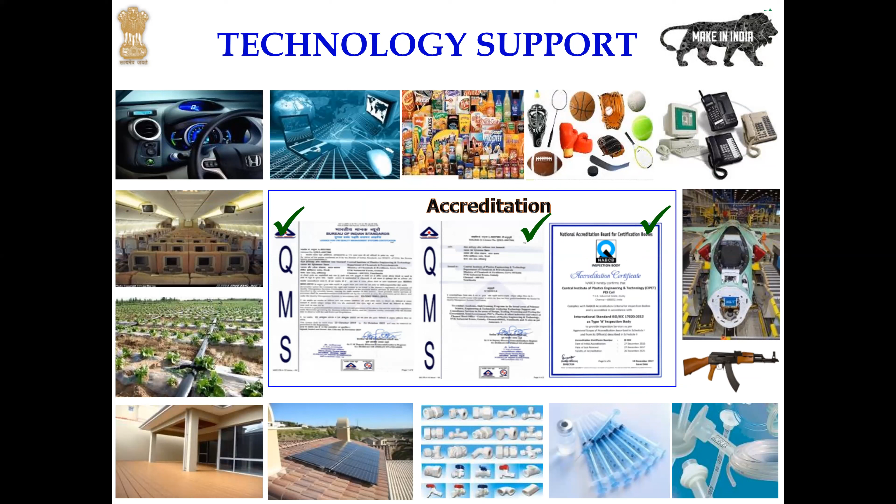Today I will be focusing only on the Bangalore Center. We have established a laboratory here, which has been accredited by NABL, NABCB, and other national bodies, and we support almost all kinds of industries for their requirements in testing and characterization for plastics and polymers.

In CIPET Bangalore, I will be covering these basic topics today: what all we do here, apart from research and development, technical consultancy, technical support services, and even specialized training, and PhD and MS by research.

So the sole purpose of the center was to set up as a one-stop facility for both design, product development, material characterization, processing, simulation, and product validation. Here we have both high-end software for designing, machinery for prototyping, and laboratory for developing materials.

So these are the few areas in which we deal, like biopolymers, composites and nanocomposites, plastics recycling, coatings and adhesives, and polymer electronics, design optimization, rapid prototyping, reverse engineering, etc.

Some of our research consultancy services cover the following areas, wherein we have specialized experts doing research and consultancy projects, for example bio-based composites and materials. Here we are focusing mainly on packaging material developed through bio-based materials. Currently we are running 2 to 3 projects on this for developing eco-friendly packaging material.

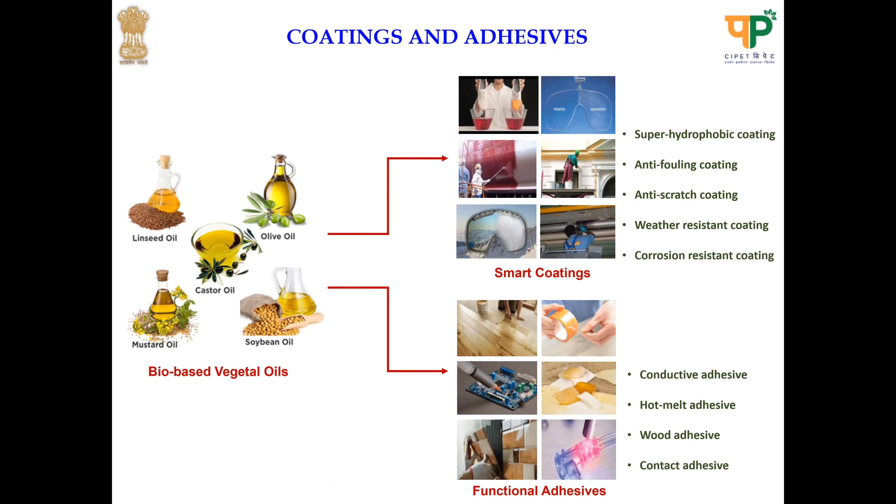In the area of coatings and adhesives, we have our expert scientists working on development of super hydrophobic coatings, anti-fouling coatings, weather resistant coating, etc.

When it comes to energy related research, here we have 3 to 4 scientists working particularly on energy materials, basically development of catalysts, development of membranes for fuel cells, batteries, etc.

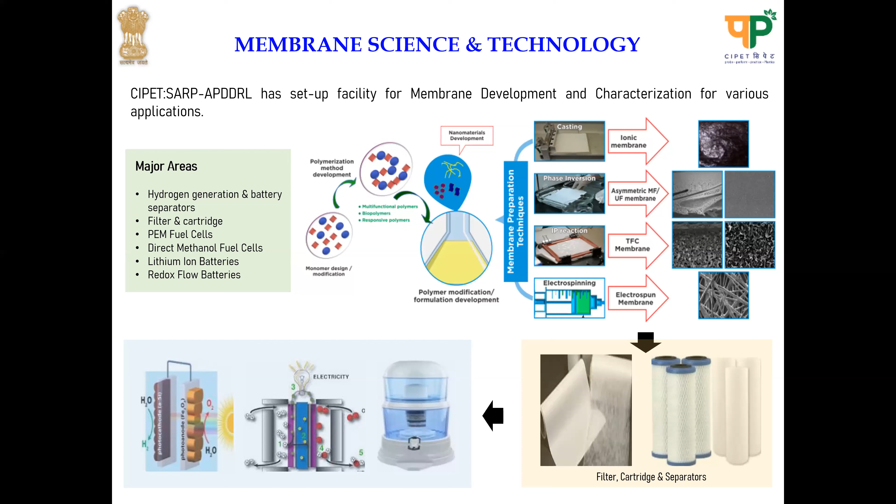We have all the setups for developing both membranes and also checking the properties of the membrane for the efficiency of it.

As CIPET has been involved in the past 50 years in plastic, we have a duty to take care of the end of life solution of plastics. So we are also working to provide solutions to industries on different types of plastic waste, such as MLP multi-layer packaging, single-use plastics, biomedical plastic waste, and currently we are running 2 projects basically on value addition of biomedical plastic waste.

And then we have the product design and development area, where we have all the software, reverse engineering hardware, prototyping machines, and all the new development areas.

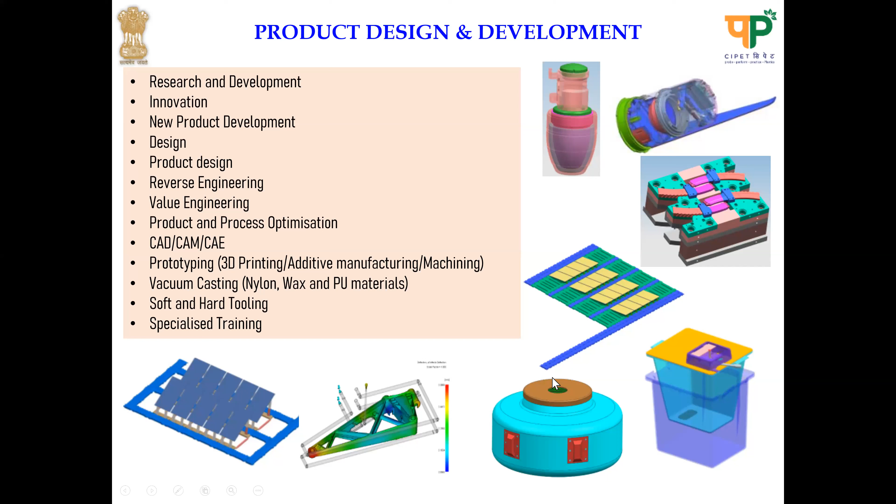These are some of the products developed by our scientists, not in this center but in the previous center where we worked. So these are some of the products showcased on the outline.

When it comes to technology support services, apart from providing the testing services, we also take care of the basic consultancy services for analysis of the material and even the product. So if any industries have any issues or defects, or are facing any problems in their processing or development of product, then they approach us and we provide them solutions for this.

So we have all the testing equipment which cater to mechanical testing, life cycle analysis, morphological analysis, thermal analysis, and other high-end spectroscopic studies.

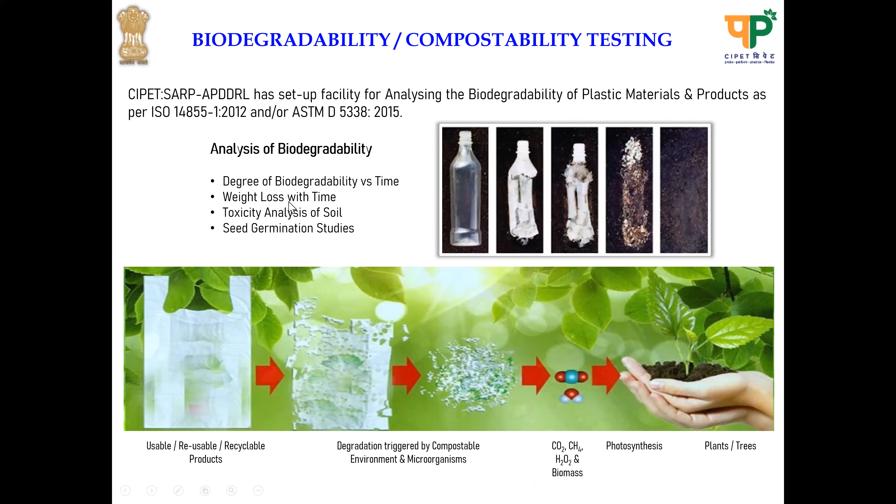And one more very hot area is biodegradable material. We do the testing of these materials. We follow the standard of ISO 14855, and we do the testing for 6 months, wherein we evaluate the performance of the material under compostable conditions.

And one more important area is the life cycle of the plastic material, like how many times the material can be recycled to be put in good use, either in the same application or in any other value-added application. So we check the material for its number of recyclable properties.

We do the analysis such as FTIR, DSC, TGA, and find out the properties of it, how the property is varying with each cycling, and then we can suggest in which all products it can be used.

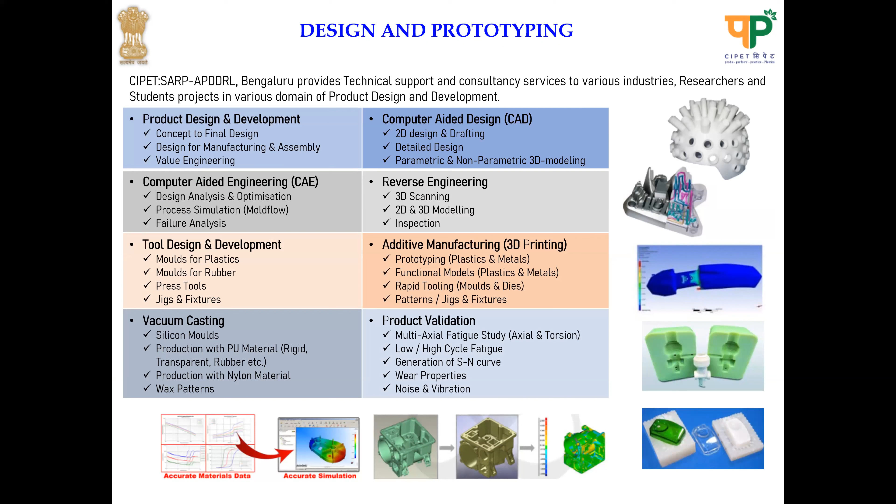As I mentioned before, we have the following facility for reverse engineering, product development, and design. For example, this one, vacuum casting machines we have. In 3D printing, we have the FDM machine.

So let me just take you to some of the facilities what we have at our Bangalore center, which is now fully established.

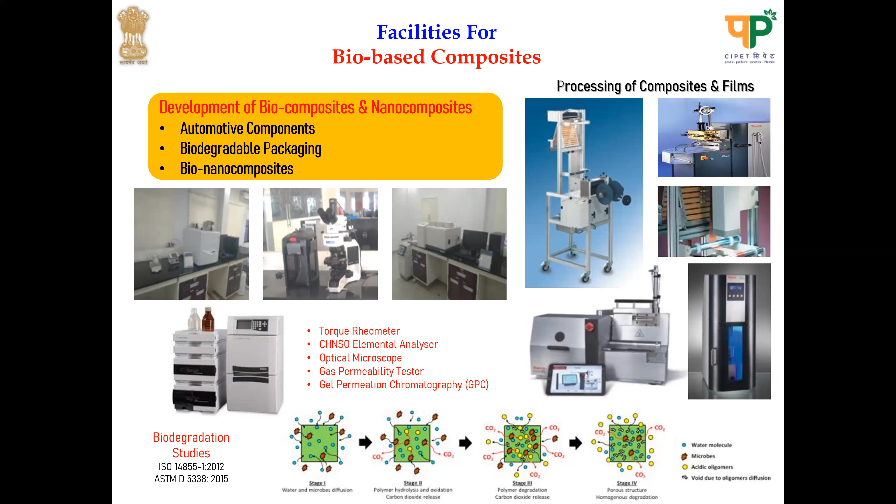Then for bio-based materials, we have this torque rheometer, blown film producing machines. Then we have GPC, micro compounder. We can also use very small amounts of material for micro compounding and producing samples. Even if we have around 10 to 15 grams of material, we can do the compounding and produce samples for testing using our micro compounder and micro injection molding machines.

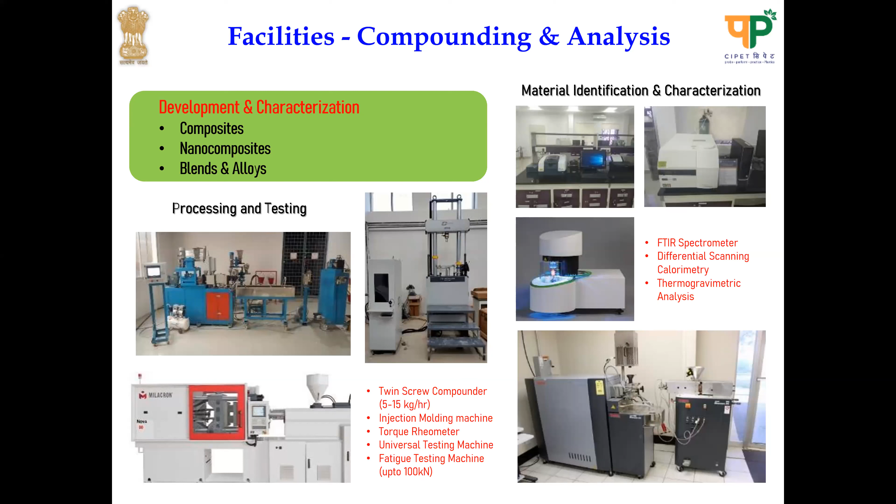Then for compounding facilities, we have a twin screw compounder, rheometer, injection molding machines for making samples. We have an 80-ton machine which can easily produce some small samples.

Then for the membrane process, we have our electrochemical workstation. We have forward osmosis setup, reverse osmosis setup, where we can check the properties of the developed membranes in-house and tweak the properties.

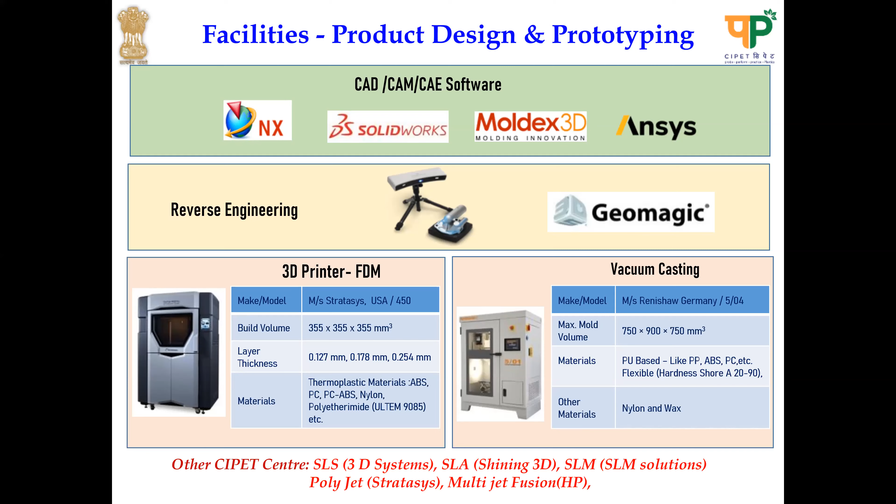In 3D printing, as I mentioned before, this is the machine we have, an FDM machine which can easily print up to 300 to 400 millimeter parts, and a vacuum casting machine which has a bed size of 750 by 900 mm.

And for testing the products, we have an axial torsion fatigue tester, which is a high capacity machine that we can use for testing plastics, composites, and even metals. It has a capacity of 100 kN. We can do all kinds of testing such as torsion, shear, and bending fatigue, and even in a specified chamber with temperature from -150 to plus 300 degrees Celsius.

Apart from that, for mechanical testing, we have this pin-on-disk tribometer and vibration lab, where we can find out the resonant frequency of either the material or the product.

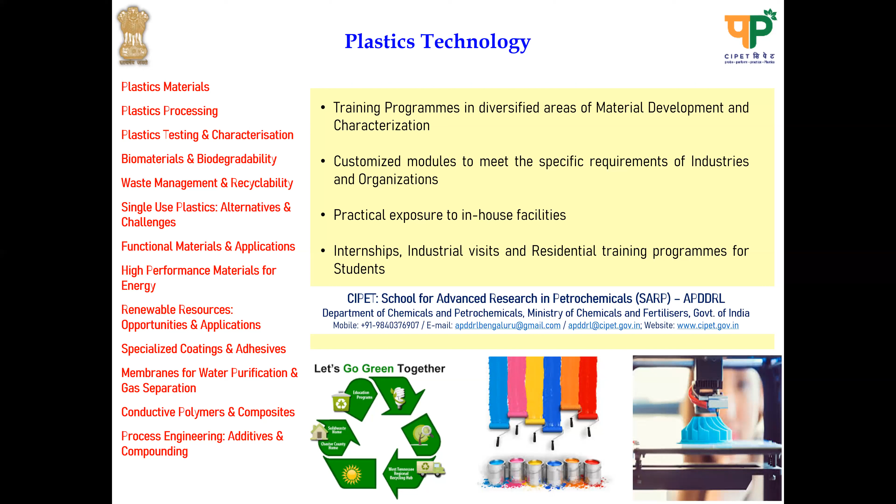Apart from this, we also conduct specialized training programs covering topics such as plastic materials, plastic processing, biomaterials, waste management, and functional materials. The topics are not limited to this - even if industry comes up with any tailor-made areas, we can cater to that. Even if we don't have experts in a particular area, we approach experts from neighboring centers or industries and give training on those topics.

And we also conduct the design program for CAD/CAM. We have software such as ANSYS, SolidWorks, Moldex 3D, and other CAD/CAM softwares.

We are registered and recognized as a research center from VTU, and we are already running the MSc and PhD program, and we will be starting the MS by research program in the coming academic year.

Before handing over to the next speaker, I would like to showcase a small video of our center.

Is the video visible? Yes.

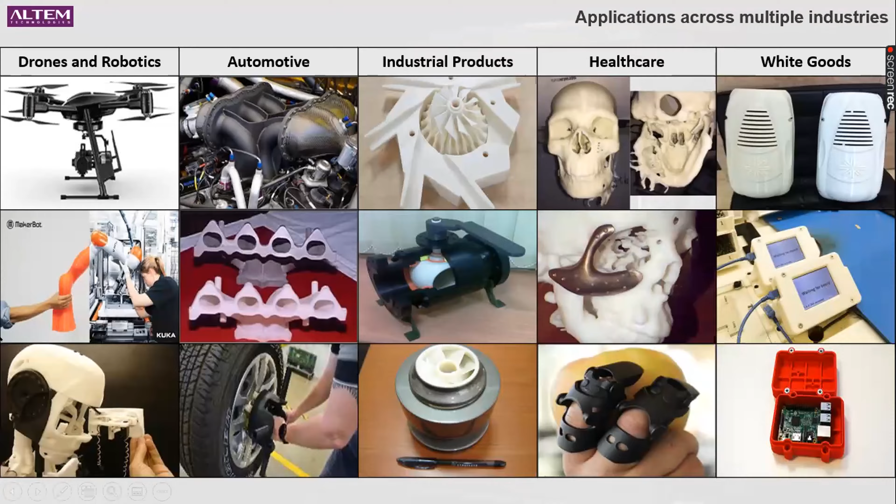I am Abhishek, representing Altem Technologies, and today we're going to talk about functional and performance applications with 3D printing.

Now, whenever we talk about 3D printing, we have a common misconception that 3D printing is only possible for basic design validation and prototyping. That is not the case. Today, with advancements in materials and technology, we have been able to take 3D printed parts into actual production scenarios and do testing on 3D printed parts in the same manner as how we would do it with conventionally manufactured parts.

Before I show you some of the work that some of our customers and we have done in this area, I'd just like to give you a small introduction about our company.

Altem started in 2011. We started as a 3D innovation platform company. What that means is that we have products and services that enable customers to go from their idea to product, ranging from design solutions from Dassault Systemes, simulation solutions from MSC software, 3D printing solutions - today's presentation is going to be more or less on this subject - as well as 3D scanning solutions.

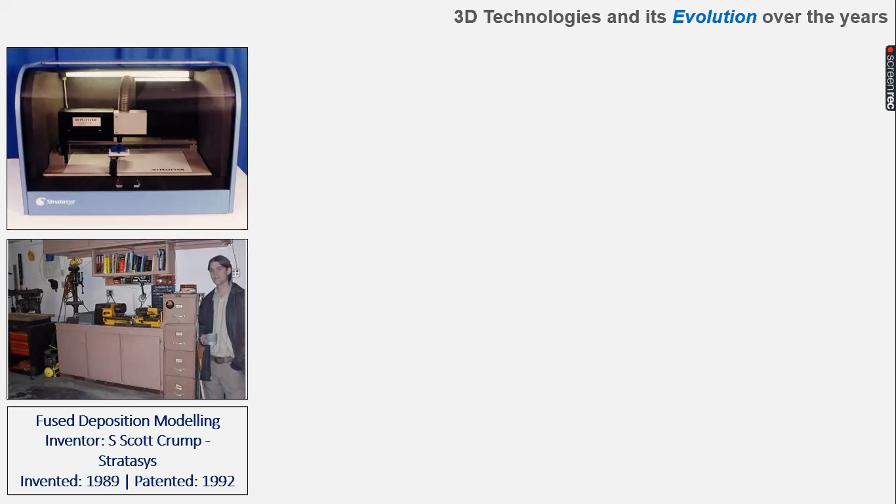And back in the day, this is what a 3D printer used to look like, and it still cost tens of thousands of dollars, which could only be able to produce tiny parts in very, very basic materials. But back in the day, it was a stepping stone to a revolution that has now come.

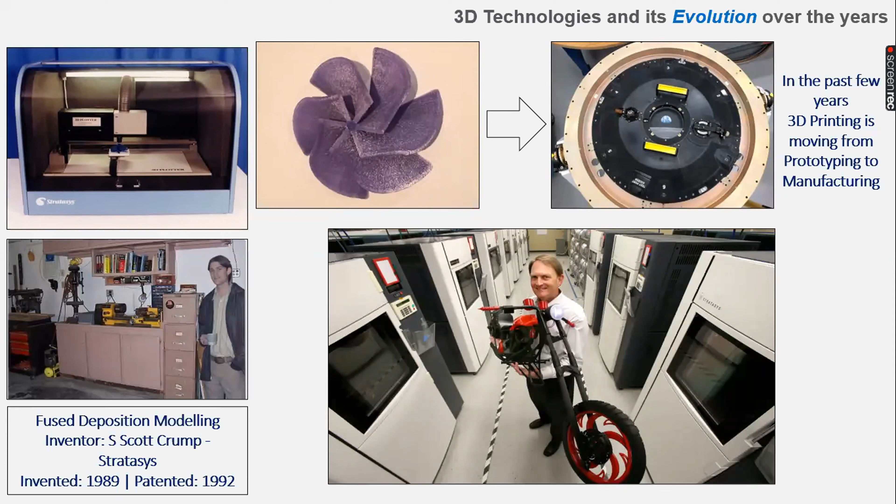But as you know, in the past 30 years we have gone to now several hundred different types of materials that we can produce, ranging from basic materials to extremely strong materials which are now replacing even metals in certain applications. Part sizes or sizes of the machines have grown exponentially from a small, maybe 2 centimeter by 2 centimeter or 2 inch by 2 inch build size to a 1 meter bed size. And today, the industry is moving towards a trend where 3D printing is being used for low volume manufacturing also, as a combination of both of these attributes - size and materials.

Now, as ma'am and sir also mentioned, one of the key benefits of 3D printing is that it can produce parts with any or every geometry or any or every kind of complexity without you having to worry about how you will make this part. When we were studying engineering, we were always taught how to design parts as per the manufacturing process. And in that process, sometimes we would lose some of the benefits of a better design because we did not have the capacity or the capability to manufacture it conventionally, or it would be too expensive or too cumbersome. But because 3D printing can produce any geometry, sometimes something which is not even possible even if you combine multiple technologies, that makes it suitable for many applications.

So in principle, any industry that requires any type of parts, whether it be one number or whether it be 1,000 number, or whether it be one design or tens of designs, can use 3D printing. Some of those industries: automotive, aerospace, white goods, healthcare, drones and robotics - you name it, 3D printing is almost everywhere.

Now, let me introduce the technology that CIPET has, and it has been one of the most successful 3D printing technologies. This technology is called fused deposition modeling. On the screen, you see a machine called Fortus 450mc, which is one of the production grade 3D printers offering from Stratasys - the same machine that CIPET Bangalore has.

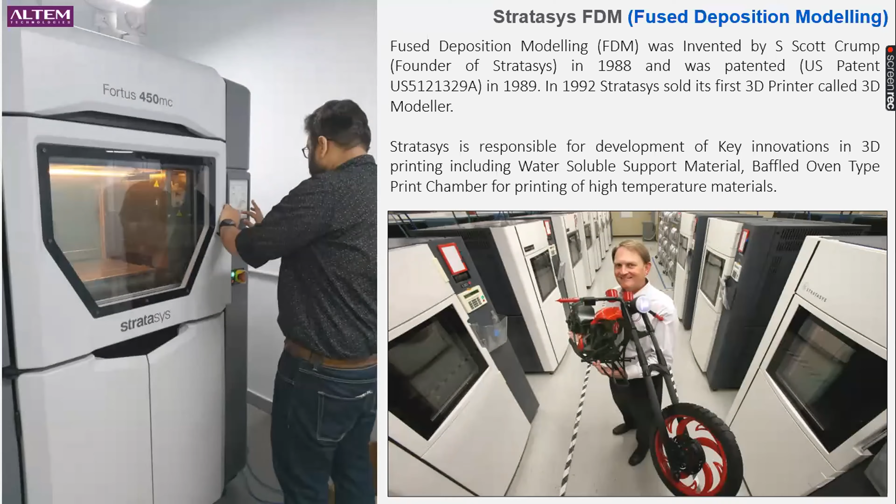And the reason why this machine is successful is because it enables you to produce as complex as possible parts, but more importantly, real world thermoplastic materials. What that means is that the properties of the materials that you get out of the 3D printer will be very close, maybe around 90% close, to what you will get with conventional manufacturing. Most other 3D printing technologies use synthesized materials, which can give you complex geometries, but are not able to give you the exact strength of material or the exact properties of the material as your conventional manufacturing methods do.

As a result, you can use these parts as replacement parts to some of the conventional manufacturing processes, as well as even use them for real world testing.

Now, how it works is very simple. I'll explain it through a video. One second.

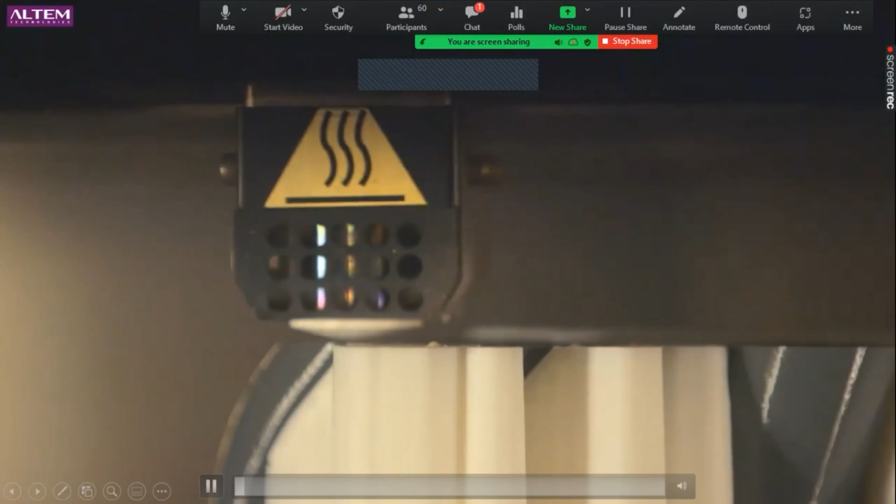This is a small video which will explain how FDM works. In a word, it's a game changer. It can create parts and geometries that you can't do in injection molding. That's going to create a revolution in the near future, and this technology will be adopted as a major process for manufacturing components.

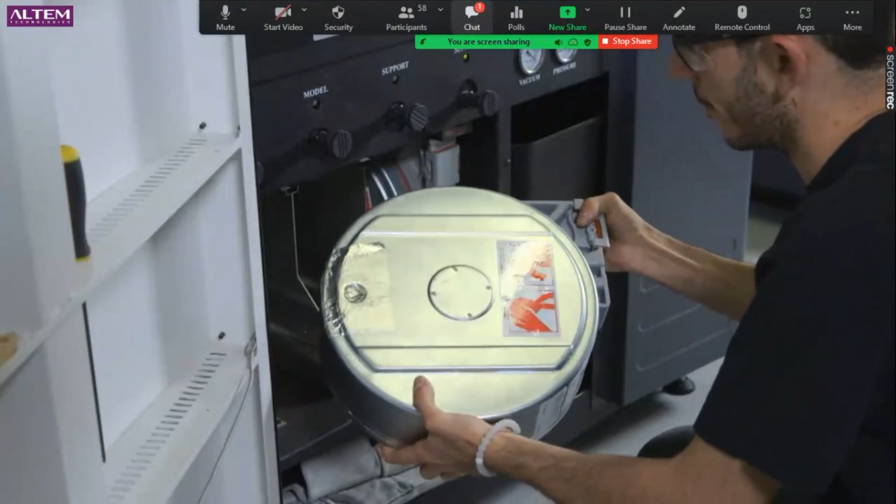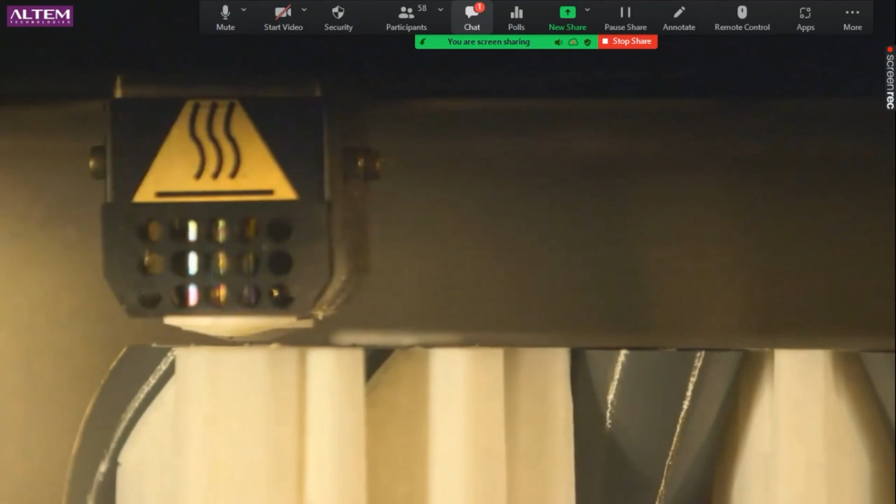FDM stands for Fused Deposition Modeling. It's a fancy word for laying down a small bead of plastic. What's really cool is you can use a real engineering grade thermoplastic, the same stuff you'd injection mold. If someone needs ABS, polycarbonate, or a high temperature Ultem, we can print it directly instead of casting or having injection molded parts done. You're getting close to the same quality in mechanical properties and aesthetics as an injection molded part, but through an additive process.

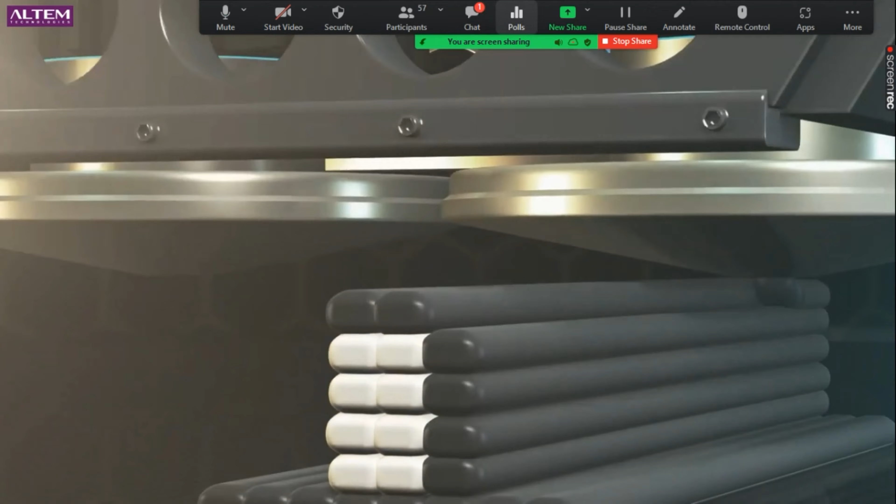Our software takes a 3D data file and slices it into layers, creating a tool path sent to the machine. The raw material is produced into filament, like fishing line, wrapped around a spool as your cartridge of raw material. That material gets fed through the machine to the head, where it's liquefied and extruded in fine layers. Support material is extruded at the same time, and layer by layer the part grows.

When the part is completed, it's removed from the build platform and the support material is removed. We also offer post-finishing operations that smooth out those layers, whether it's hand finishing or cosmetic paint, so we can still provide smooth looking parts.

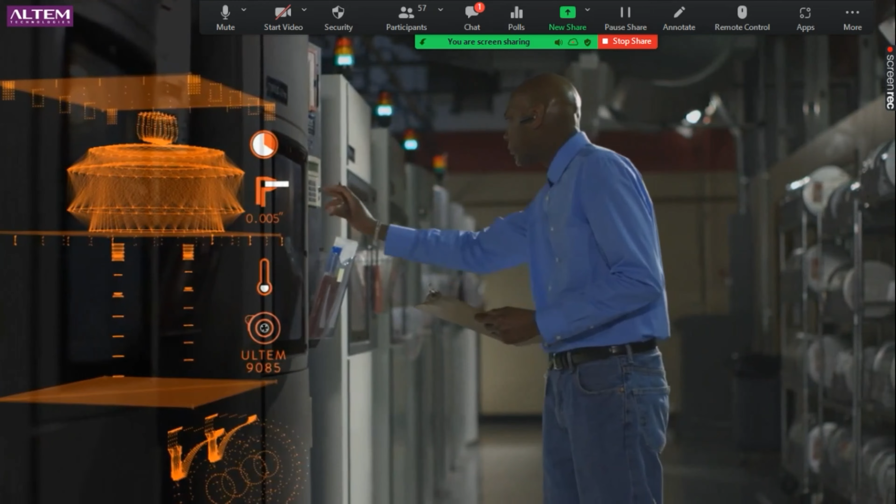We developed the technology to fit a full breadth of geometry sets. We've seen it used anywhere from small prototypes for mock-ups and test fitting parts, to really large structural pieces that go on airplanes or UAVs. We've gone from doing simple concept models, one or two at a time, to now doing production runs of 5,000 to 10,000 parts, actual parts coming from FDM technology.

With it, we can do things I have yet to even think of, but the younger generation is going to take this FDM process and turn it into something that's going to blow me away someday.

That essentially explained how FDM works and what kind of materials we can produce. One of the key benefits of this technology, as I explained earlier, is the fact that we can use real world materials. Today we have about 15 different types of polymers, super polymers as I like to call them, ranging from basic materials used for prototyping applications such as ABS.

We also have electrostatic dissipative materials, very suitable for conductive or electronics applications, high impact materials such as polycarbonate and PCABS, and strong but flexible materials such as nylon. Then we have high performance materials such as Ultem polyetherimide, PEEK polyether ether ketone, and carbon fiber reinforced materials. All of these materials are fire resistant and chemical resistant.

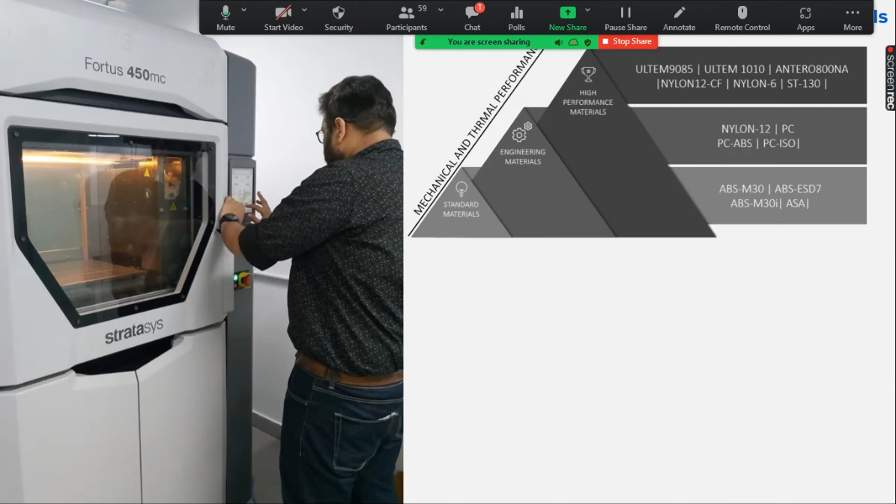They have temperature resistance up to 220, 230 degrees centigrade, so these materials can really be used in applications where complex geometries are required, but also functionality and strength is required, whether it be smaller parts or very large assemblies where you can print the parts in sections and then assemble them together.

Some material properties are on the screen for you to take a quick reference. You can take a screenshot of the slide if necessary. However, I think we'll send a white paper as well.

Some of these materials, for example Ultem 9085 and Ultem 1010, are aerospace certified materials. What that means is that they are pre-approved by the FAA to be used in aircraft. Our Indian aircraft, satellite, and missile manufacturers are also using these materials to put parts on aircraft, satellites, and missiles. Beyond the aerospace industry, this material is fire resistant and chemical resistant.

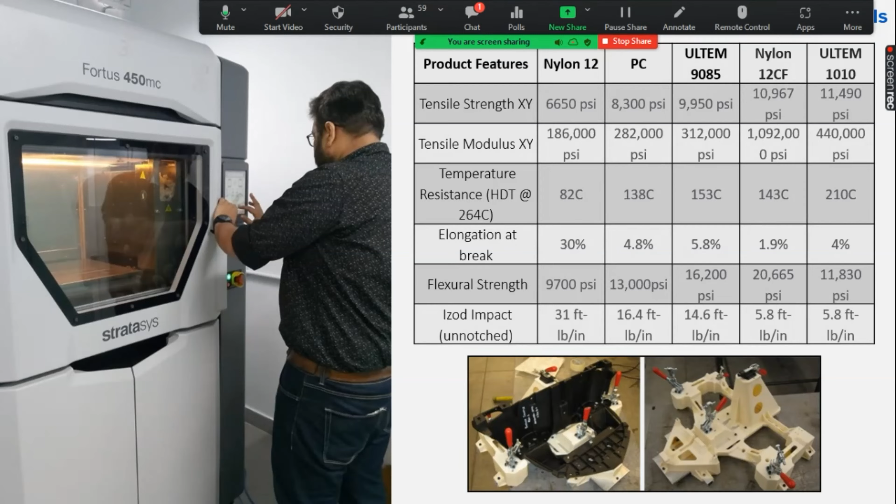So even if you are not an aerospace company but have requirements of high temperature or fire resistant materials, you can use it. Another very interesting material is nylon 12CF, which is 35% chopped carbon fiber by weight with nylon, which can produce parts even stronger than aluminium. The stiffness to weight ratio of this material is better than aluminium. So we have a lot of customers replacing conventional bulky, heavy aluminium parts with 3D printed parts, and they've been working very nicely.

This particular part was actually done for a Formula One car. And you can imagine that a Formula One car has a very high stress environment as compared to a normal passenger car. It works at very high speeds, difficult tracks, and so on. The aerodynamics is very different. We were able to print a part in Ultem 9085 material and run it throughout the entire season for a commercial Formula One application.

So that's the epitome of what 3D printed parts can do for you. They can work as good as conventional parts, but you can have a part like this in hand in a matter of 24 to 48 hours, as compared to the 6 to 8 weeks, or 5 to 6 weeks, that you would require to produce it conventionally.

Now typically 3D printing can be divided into 3 applications. Application number 1, which we all know, is design validation. You are designing a new product and you want to see how your design looks like, feels like, and fits like. You can quickly take that CAD, put it into the 3D printer, it will create a prototype. In a matter of few hours, you can use that prototype and check your fitment.

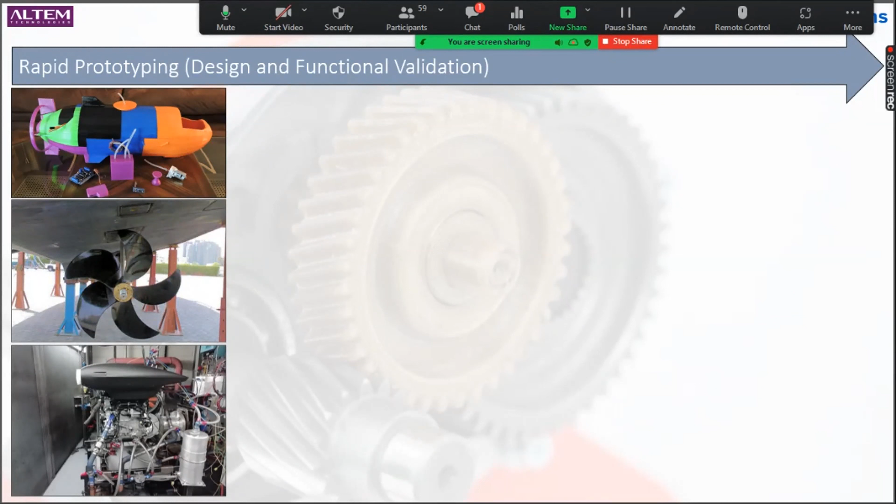But that's not enough. Today, industries need prototyping to be not just design validation, but also functional validation. So with the help of the materials I told you about earlier, you can actually print the part, put it on the real world test scenario, and run the test as you would do it in the real world scenario.

The next application is manufacturing application. Now what if you have complex designs but low number of parts? One example on top of my head is drones. For those coming from the drones industry, drones is a very custom application. While the drone body might be the same, drones today are made so they can be heavily customized. Today you want to put a camera on your drone, tomorrow a heat sensor, the third day something else.

So you can't keep buying new drones every time. For applications where the number of parts is low, maybe 500 or 1000, 3D printing can be directly used in end-use part scenarios. But what if you're in a scenario where you have either a very large number of parts, high complexity parts, or you want to produce a part in materials not available with 3D printing? That's where the application of rapid tooling comes in.

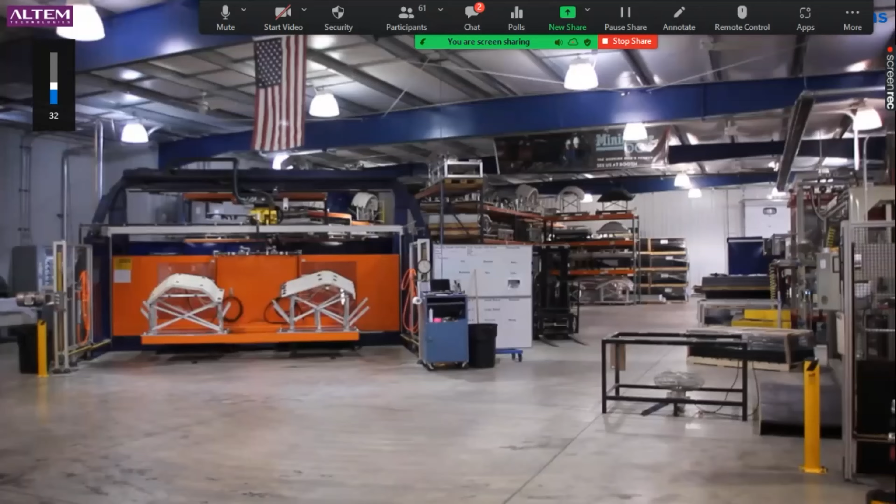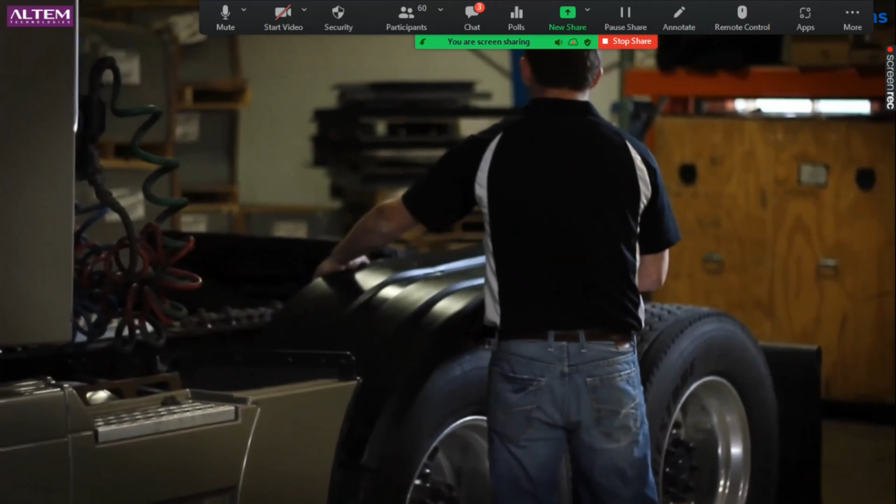My name is Craig Kruckeberg, CEO of Minimizer. We are a manufacturer of plastic truck parts for the heavy truck industry. We've been in business since 1984. Here at Minimizer, some of the projects we work on are injection molded components, and primarily right now we're looking at several mounting brackets. A lot of these parts are made from glass fiber and rugged plastic materials, so it's a challenge to prototype those products. With the black Ultem material, it's very high tensile strength and rigid. We found that black Ultem is a good alternative for us to prototype these mounting brackets and even take them out into the field on a truck and test them out.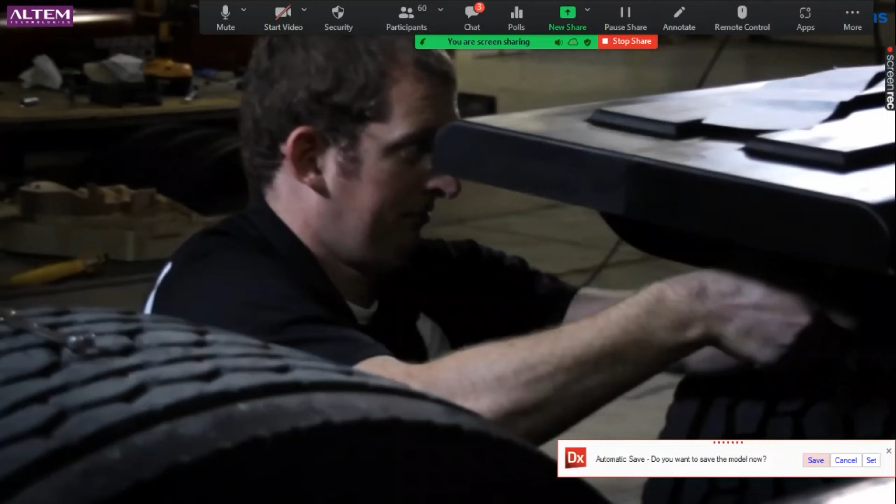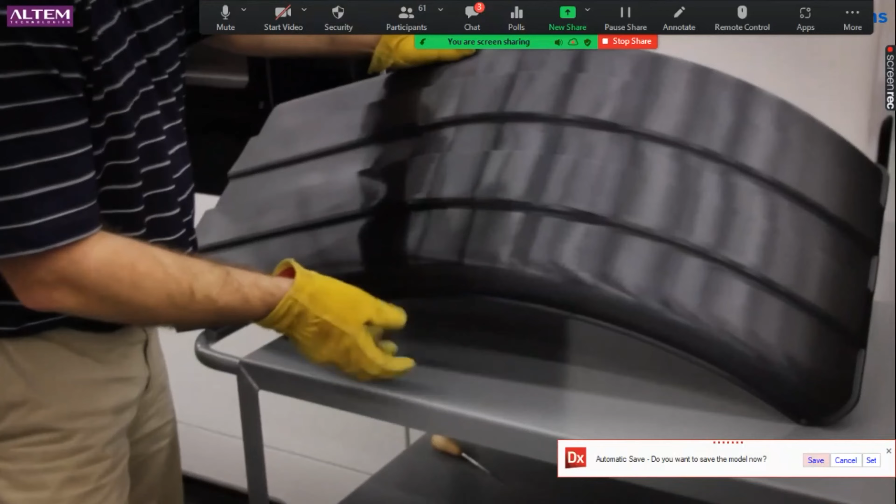When we make an FDM part, we mount it on a truck, so a lot of times there'll be drilling, using fasteners, even mating parts together. The black Ultem material is valuable because if there needs to be any sanding or cutting of the part, it allows us the flexibility to do that, but still have an aesthetically pleasing part to put on a vehicle. The reason for black Ultem, and we're excited about this, is that 90% of the color of my product in our industry is black. We caught one of our OEMs actually using the product in road trials with the Ultem, and they decided that in this application they don't need to tool up for it, so if we could just print out 15 of these for a military contract, that's all they need right now. So we said, okay, give us that part back, we'll give you the Ultem in black. That's when we found out this came out. We were going to paint it, but now that it's coming out in black, we don't have to worry about the paint. Having the black material is a big bonus for us. We don't have to spend the time to finish the part, and at the same time we get the same material properties that we look for in the Ultem material.

So again, this video shows you how a commercial automotive company, a truck manufacturer, is taking 3D printed parts and using them in high endurance scenarios where the part has to go through all sorts of mechanical loads and stresses, and it is strong enough to be used as an end-use part, solving not only a technical challenge but also a commercial challenge, of how you make parts when you have very low numbers and tooling is not justified.

Another example is from a pump manufacturer in India, where, as you can anticipate, the profile of the pump determines its efficiency, and that's the parameter that has to be tested. So instead of waiting 3 to 4 weeks to have a sand cast pump in hand, this company produces 3D printed prototypes, tests them in real world conditions at 3100 kilopascals of pressure and about 20-70 degree temperature, and on that basis they're able to get an idea of whether their profiles are correct or not.

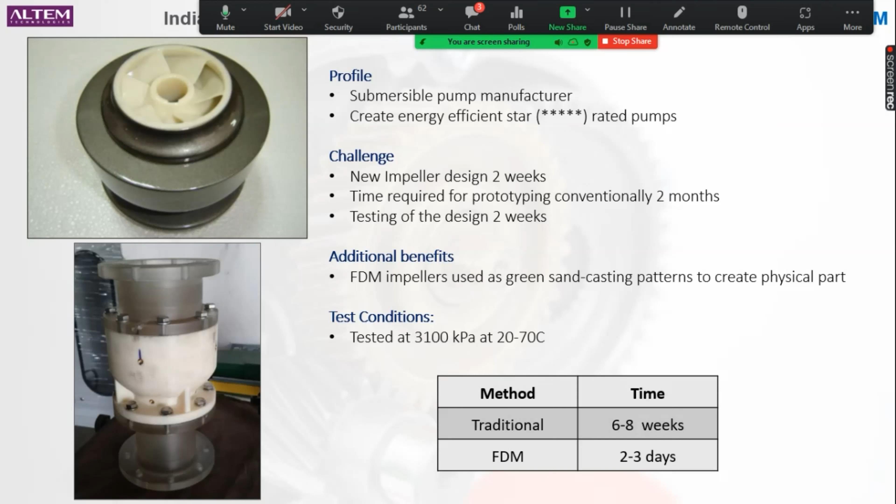That's not all. They also use the same 3D printed part as a subsequent master pattern for sand casting. They take the 3D printed part, create a metal part out of it using sand casting, and then use that for further testing. So within the same prototype, not one but two challenges are addressed, and they're able to get their complete process and testing done in a matter of 2 to 3 days, at substantially low cost compared to the 6 to 8 weeks it would take with conventional tooling-based methods.

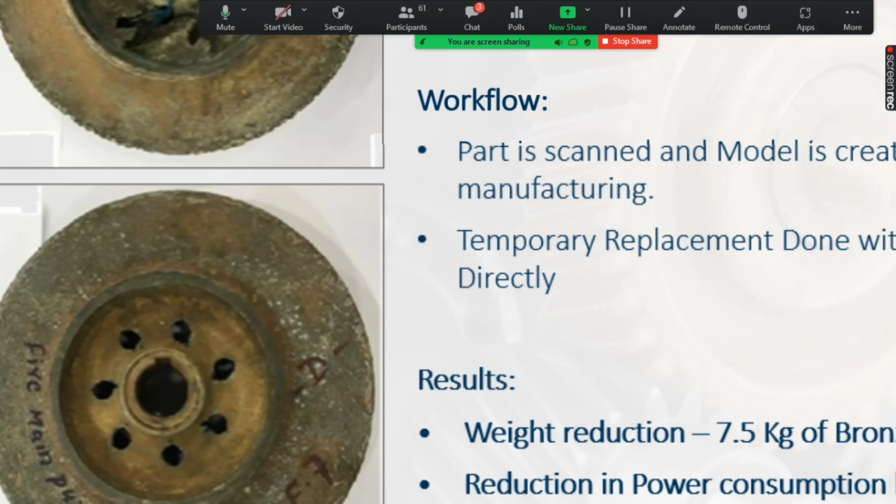Another example, and I think this is the last or second last slide, is a replacement part application. Very often, several industries have parts on their products which are either too old with no supplier base, or too costly to import or manufacture. In this case, from a submarine application, the part was completely rusted and corroded and no longer fit to use. The holes were completely damaged and the surface completely abrased. So what we did is 3D scan this product and reverse engineer it, since no drawings were available.

While the conventional tooling was being made, which took about 4 to 5 weeks, we 3D printed the part in carbon fiber material, sealed and painted it, and actually deployed it onto the submarine. So until the conventionally manufactured part was ready, a 3D printed part was used as the replacement and ran successfully. We also have customers who have completely replaced conventional metal and polymer parts with 3D printed parts in applications where it's very expensive or difficult, if not impossible, to get the original part or material.

Let me skip this. Let me also skip this in the interest of time.

Now, this is interesting. This is going to be my last case study. One of the very useful benefits of fused deposition modeling, FDM, is the fact that we can produce parts which are hollow from inside. This not only enables us to save weight and hence cost, but also enables us to integrate certain features from inside the product. Now, what you see here is an end of arm tool.

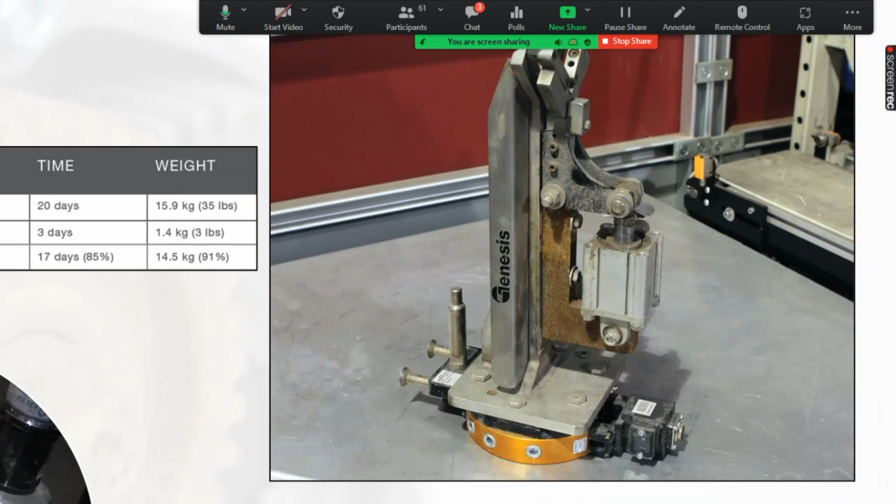The purpose of this tool is to hold a glass fiber sheet in position during a water jet profile cutting process. If you look at this conventionally manufactured part, it's very bulky with a lot of things hanging around it, like motors and vacuum lines. So the customer re-engineered the part and had all the vacuum lines go from inside the part, with a hollow channel through which the inlet and outlet vacuum lines pass.

The weight of the robot was reduced from 16 kg to 1.5 kg. The lighter the robot, the faster it can move. The manufacturing time was cut down from 20 days to 3 days, and there was approximately an 85% time saving.

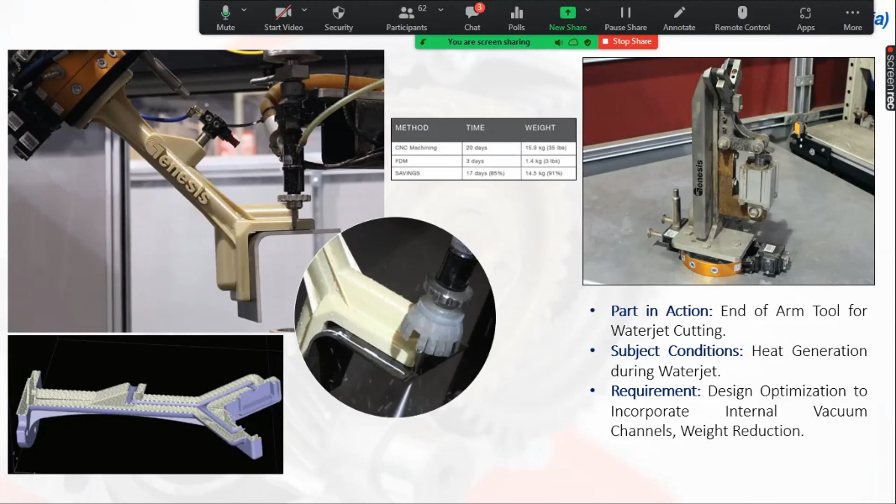So those of you from the manufacturing industry with robotic lines running on factory floors, end of arm tooling is a very interesting application of 3D printing. You can get in touch with us at Altem, where we can help you re-engineer or redesign the part and take the most benefit of 3D printing, save costs, save time, and make your factory smarter and more efficient.

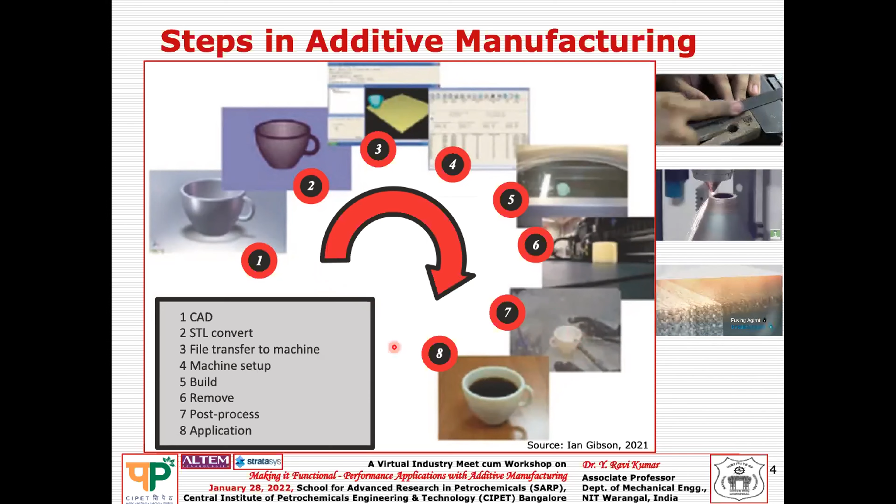So then your application is ready here, right? These are the typical 8 steps that any AM process should undergo.

So then why additive manufacturing? Why can't it be conventional manufacturing? Definitely, additive manufacturing is going to give an opportunity here to enable new geometrical shapes.

For example, if you come from the tool industry, you have the concept called conformal cooling channels. Your AM will enable you to manufacture these kinds of conformal cooling channels, which conform to the shape of the component - something not possible through conventional manufacturing.

If you do conventional manufacturing, it may be a very costly affair. Why? Because once your complexity increases, your cost increases exponentially in conventional manufacturing methods.

Whereas additive manufacturing will leverage it - your cost will be the same irrespective of complexity, and at the same time you get the double benefit of improving the performance of the product. So you're getting lower cost as well as improved performance.

So new geometrical shapes have been enabled because of this technology, and cost is also reduced, right? Ultimately, in the tooling industry, where cycle time needs to be reduced, cycle time has been reduced by integrating this technology in your industry, right?

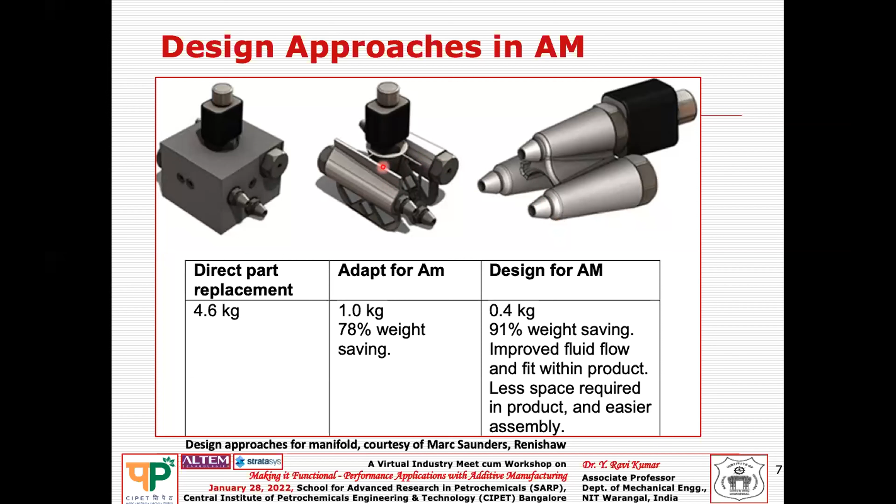So where 1 kg is now 0.4 kg, compared to the original, that is 91% reduction in weight. It also improves the fluid flow, the fitment, and is more compact in size. So you have the advantage of fixing it in less space, and this product is easily assembled. This is the kind of benefit you get once you migrate from conventional manufacturing to additive manufacturing.

So this is one observation where your design approach for additive manufacturing should be somewhat tweaked. And further on that discussion, say you have a solid block manifold design, and the scan time for this, if you do it on a metal machine, for the hatch pattern, is 191 hours.

But if you tweak this design from solid to a shell block kind of manifold design, now your scan time is 36 hours. So the machine cost is reduced accordingly. And now the material weight is 1.2 kg, so you have saved in terms of material cost as well. The service bureau quoted 3735 as the cost.

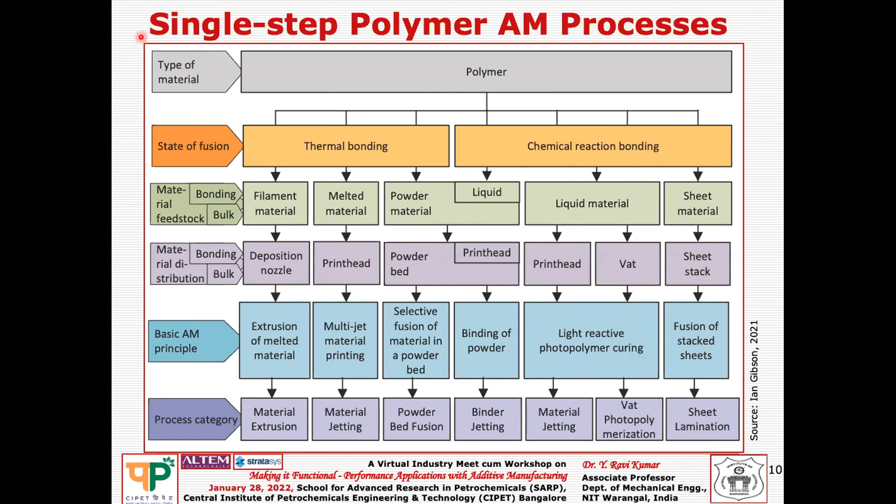And lastly, another chemical reaction bonding kind of process, where a sheet or laminate is stacked together and these stacked sheets are fused. This is called the sheet lamination process. So all 7 processes are capable of polymer printing in a single step.

Coming to metal, you can process it directly through only 4 categories of 3D printing or additive manufacturing machines: either a DED system, that is directed energy deposition, or material jetting, powder bed, or sheet lamination.

I'm calling this single step because some metals or technologies may go through a 2-step or 3-step process, where you get a green part, and further steps like infiltration, debinding, and finally sintering in the furnace give you the final metal part. But all these technologies here can do printing in a single go for the metal part.

So it's a metallic part here. The state of fusion may be melted, solid plus melted, or solid state. Your feedstock material may be filament, wire, powder, or sheet laminate. You distribute the material through a nozzle, or lay a powder bed, or bring a sheet or laminate as feedstock.

The basic principle here is that you selectively deposit material onto a substrate. You may use an energy source like electron beam, laser, or inductive heating. This is the directed energy deposition technique or a material jetting system under this category.

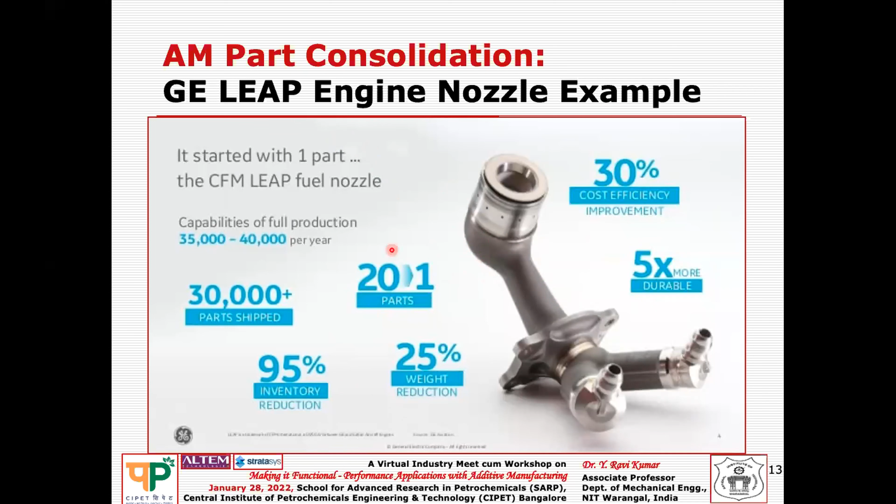That's because it's only digital inventory now. Once you migrate to AM, inventory is reduced by 95%, weight reduction is 25%, cost effectiveness is 30%, and it's 5 times more durable. So you can understand the capability of AM.

Now it is a single part. So the advantages or the drivers are: easy to design, less supply chain, no tooling, less labor, no assembly, less certification, lighter product, and you have a better product.

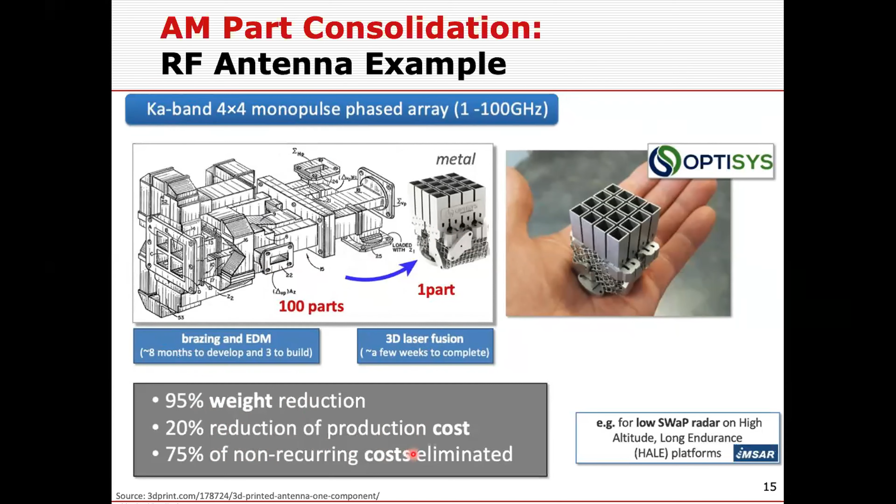There are case studies where part consolidation happened from 100 parts in a traditional design to a single additively manufactured part. Traditionally they used a brazing and EDM process with a lead time of 8 months to develop. Now, because of additive manufacturing, it takes only a few weeks to complete. There's a 95% reduction in weight, 20% reduction in production cost, and 75% of the non-recurring cost has been eliminated because of this AM.

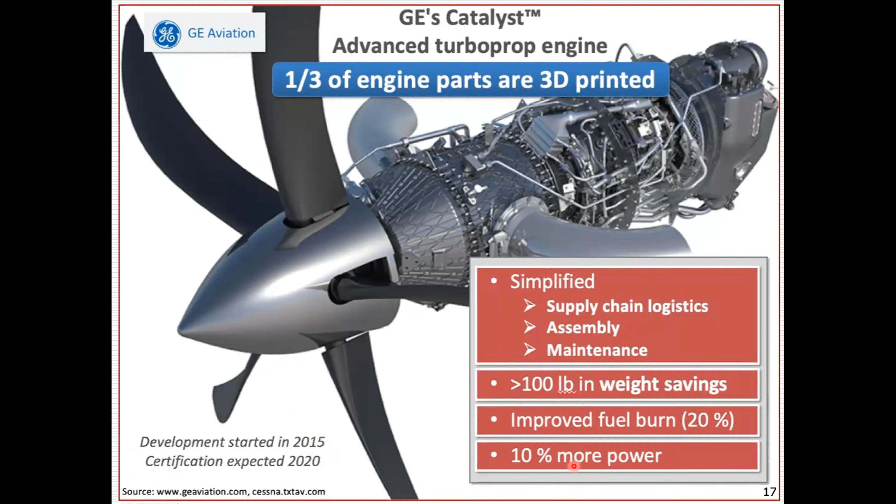GE has even made a kind of catalyst engine where they targeted 1/3 of the engine parts to be done through additive manufacturing. This project started in 2015, and recently they got certification from FAA. The advantages include more simplified supply chain, simplified assembly, simplified maintenance, weight reduction, improved fuel burning efficiency, and 10% more power. These are some of the advantages you get from part consolidation.

For people from the tooling industry, conformal cooling channels are the biggest driving force for AM application. With conventional methods you can only do a straight drill, but with AM you can conform your channels to the shape of the product you are looking at. That's where AM is shining in conformal cooling design.

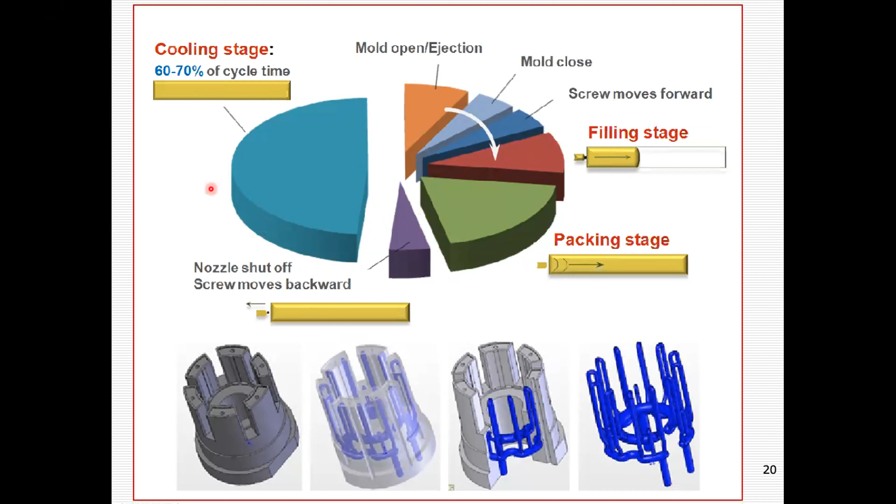60 to 70% of cycle time goes to cooling time reduction, and this is because of the conformal cooling channels, which conform to the shape of the product being fabricated. This is the biggest advantage for the tool making industry, which is integrating AM into tooling.

Conformal cooling channels have better heat distribution compared to conventional cooling channels. You can see the heat distribution, and internal stresses have been minimized, ultimately improving quality and reducing warpage and shrinkage problems. You can precisely control plastic solidification in the mold and minimize distortions or shrinkage problems that occur in traditional ways.

This is another case study showing conformal cooling channels designed in the product, ultimately printed in one of the metal AM systems in a single step - designing the tool in a single step, which is only possible through additive manufacturing. This is another research paper that demonstrated this.

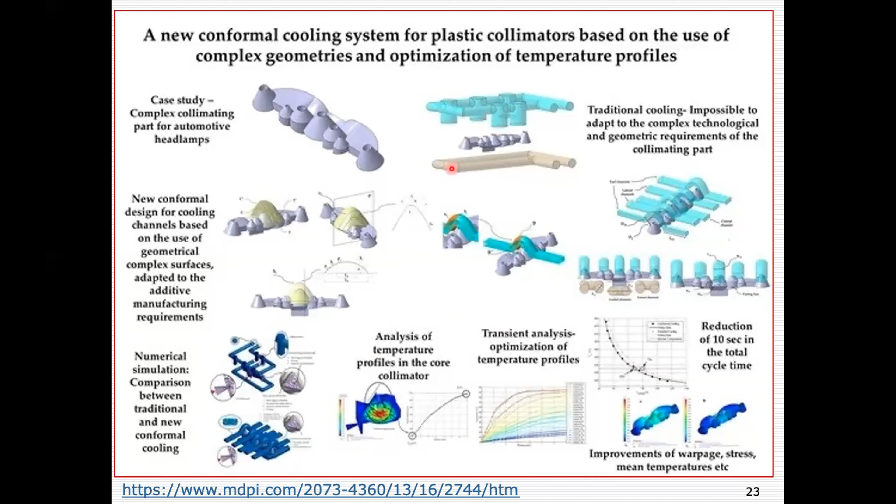This is an automobile headlamp part, a case study published in one of the articles. You can see the additively manufactured conformal cooling channels versus traditional cooling channels, and even the numerical simulation results show better improvement in reducing warpage and stress mean temperatures. These are the advantages you get compared to traditional tool designs, as shown in this research article.

Another case study demonstrated improved cooling efficiencies, enabling innovative mold designs, including ways to accommodate support structures. This is where design for AM plays a major role - how you are able to tackle designing self-supported structures for these channels.

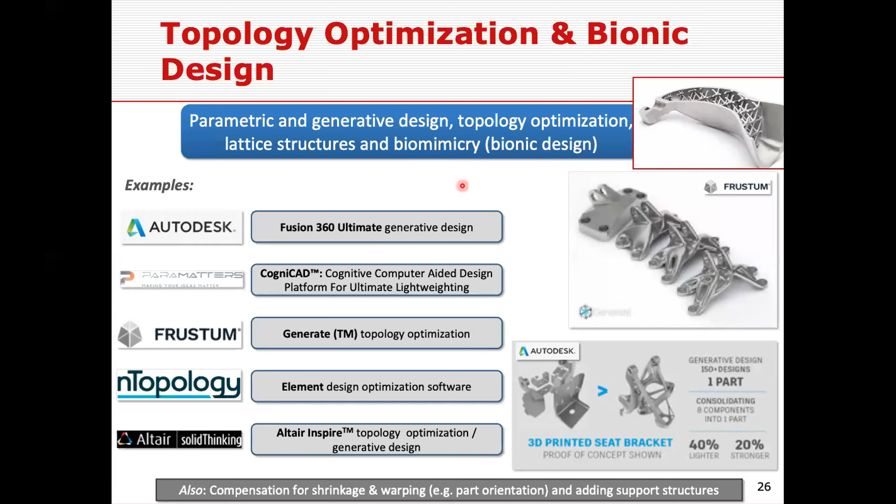And further lattice-based designs, which you can see, will improve the cooling efficiency of the tool. Additive manufacturing is going to play a major role here. Topology optimized structures and bionic designs are very much connected to additive manufacturing, where you can optimize your product topologically, or even bionic designs, all done in a single shot. Any topology optimized, lattice-based, or bionic design structures can easily be done through additive manufacturing if you follow the design guidelines.

We'll discuss those guidelines in a very quick manner. We don't have much time, so we'll quickly discuss that also. We do have certain topology optimization software.

Coming to build simulation, you need to have the support structure optimized. You have a certain model, and it may be getting distortions or residual stresses built inside. So how do you optimize this? Suggesting distortion compensations, optimal supports, or minimizing the risk of printer damage. This is for the metal machine we have at our facility.

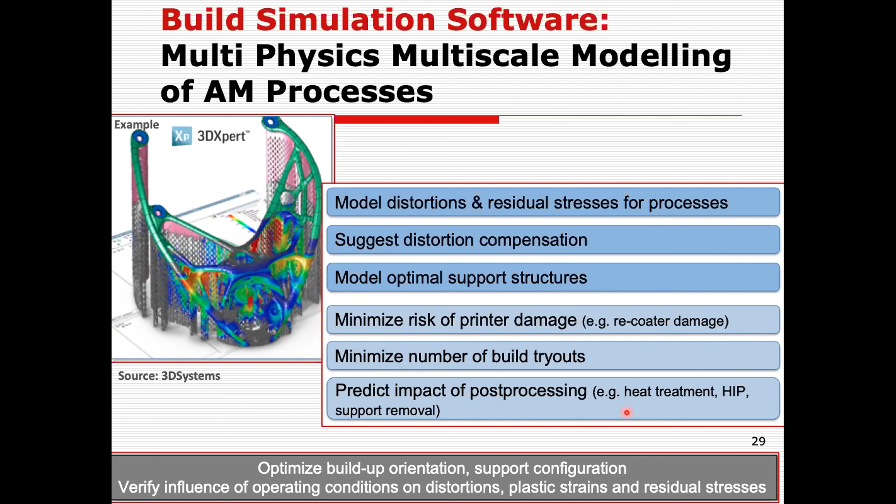We are using this for the simulation of metal 3D printed parts. It will even predict the post-processing, like heat treatment, HIP, support removal, and all that.

I have listed some of the simulation softwares for additive manufacturing, both for polymer as well as metal. You have a lot of software from developers like ANSYS, 3D Systems, Autodesk, Siemens, or Additive Works. I might have missed some commercial softwares also. You can find a lot of commercial software nowadays, with much emphasis on multi-physics based simulations of AM related stuff.

Let us focus some time on the design rules for polymer AM technology. The biggest challenge here is anisotropy, especially for polymers, and it will vary from process to process. Extrusion may have a different ball game, and a VAT-based system or material jetting system has a different ball game too, but anisotropy is something we need to tackle.

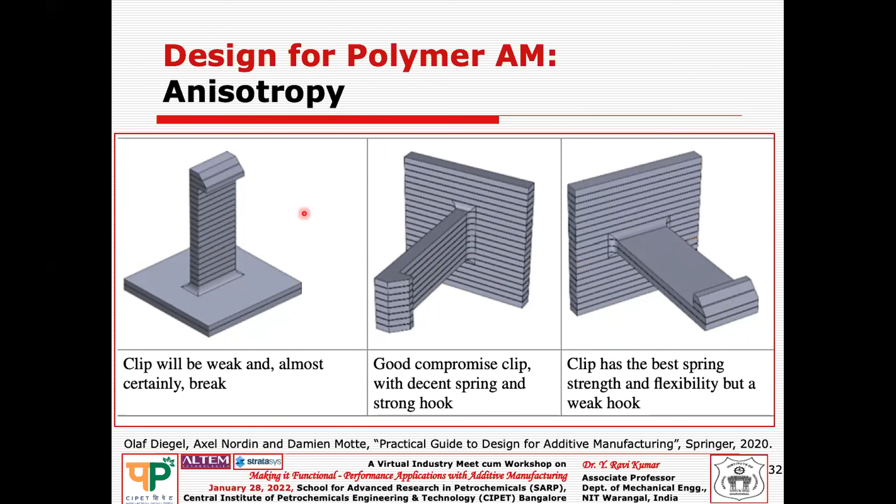So your design orientation matters - to some extent, you can minimize this. One orientation may be weak, and almost certainly it will break, but if you change the orientation it may give better compressive strength or spring and hook strength, or even lead to other benefits which we need to understand. So we need to fix the right orientation to tackle this.

Even wall thickness - you try to minimize this. For lightweight consumer products it may be 0.6 to 2.5 mm, or for heavy duty industrial products it may be 3 to 5 mm. You maintain a 10 degree angle to minimize large flat surfaces, otherwise it may lead to a lot of distortion. Following certain guidelines will save you these kinds of problems.

One other issue is the support structure and the overhang. Your angle matters a lot - if it's 10 degrees you have a different support structure, or at 45, 50 degrees you have a different support structure altogether. We need to understand and optimize the support structure and overhangs in your design.

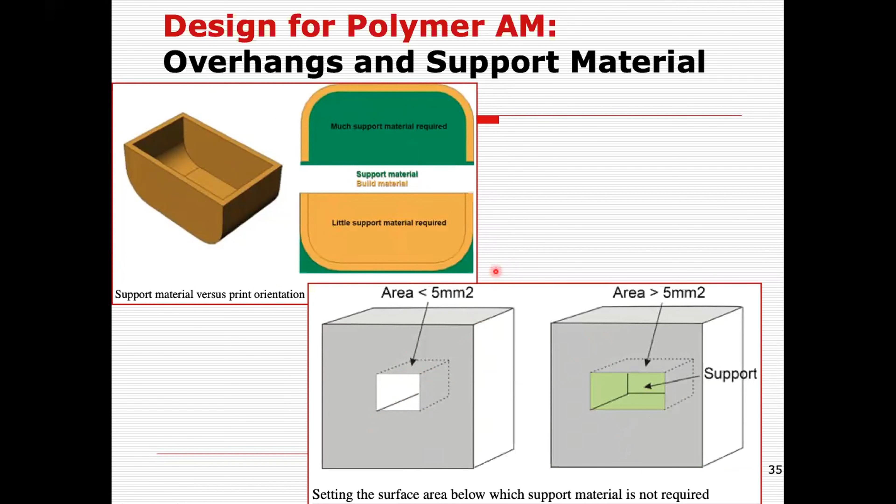Your build orientation will also dictate how much support material is going to be consumed. If the area is less, your supports may not be required or can be minimal - we need to work on these to optimize this. This also affects the thickness of the component, even the minimum size of the hole. You could realize thicknesses of 0.5, 0.8, or even 1.5, 2mm, everything is realized.

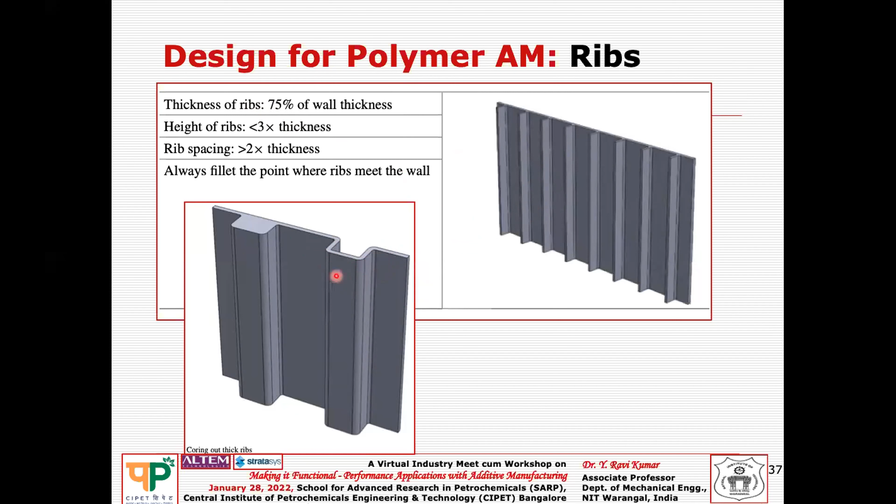And of course you do have some ribs that should have some design rules, which we need to follow. We need to make it so that your thick ribs should be cored out to a kind of this kind of a thing, and we need to follow certain guidelines here.

Especially like a powder bed system or a vat based system, there will be material that remains inside. If you are making this kind of a part, you need to provide some salt shaker holes to remove that material. So we need to understand these design rules accordingly.

Coming to metal, you have a different ball game here altogether. We need to compensate your laser diameter, similarly to how you do tool length compensation or tool diameter compensation in CNC technology, where we need to compensate this beam offset in your metal system. It's a laser based system, and we need to work on parameters like hatch space and contour spacing.

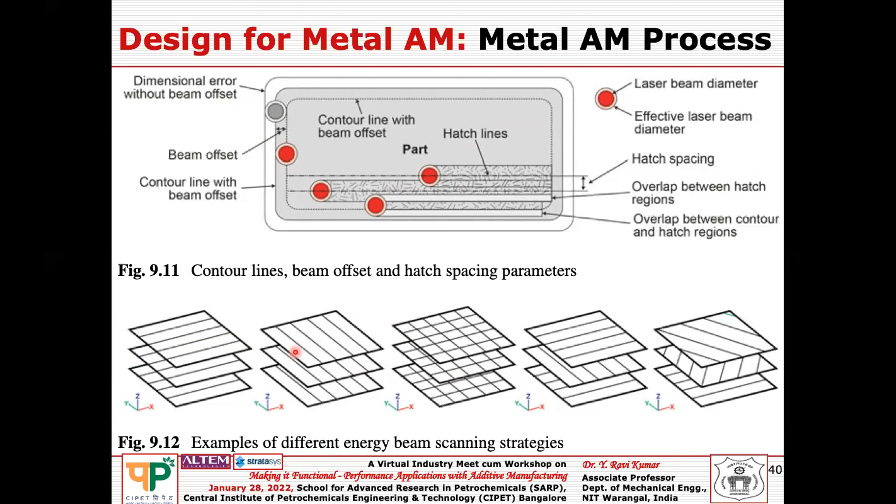Otherwise you may end up with errors or challenges that you will be facing. You may use different energy beam scanning strategies, which may be useful to come out with solutions for your situation, where sometimes more residual stresses get built inside, or shrinkage and warpage kind of stuff, which you could manage by varying these parameters.

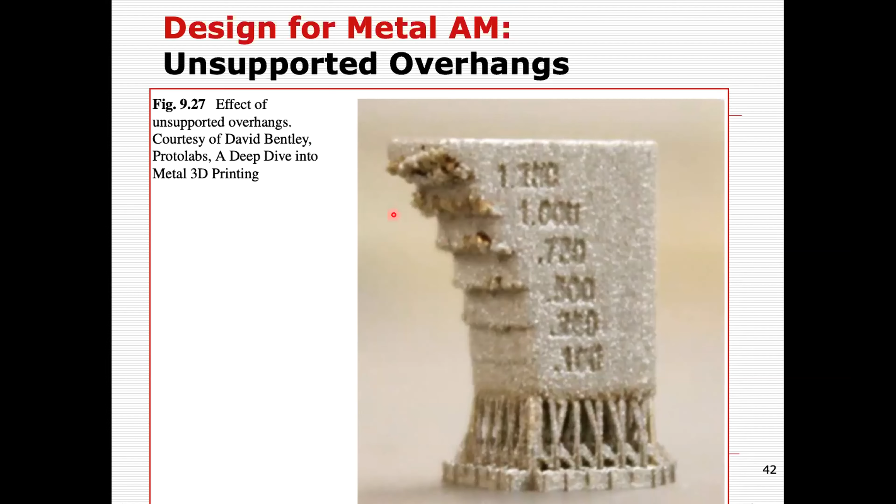And you have unsupported overhangs, like again you can see 1.2, 1, 0.7, 0.5, 0.2, 0.1, and we need to understand these kinds of features in your design and act accordingly. Otherwise, you may end up with a difficulty, right?

Another major challenge here is residual stress. If you see the effect of residual stresses on the metal-based AM system, the support material or mod material has been peeled out, right? It's not strong enough to support the model, or even the model has been split here because of the residual stresses that have been built inside.

You have certain scan patterns which you can use accordingly. Say you have a meander kind of hatch pattern here, which has a high build rate and high residual stresses, and is suitable for small or thin parts.

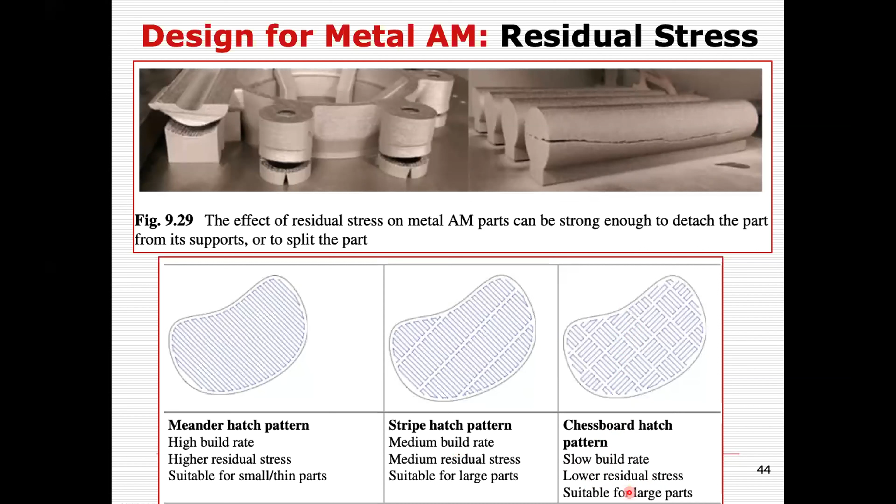And you have a stripe kind of hatch pattern. This is meant for medium build rate, medium residual stresses, and suitable for very large parts. And you have a chessboard or checkerboard kind of hatch pattern, which has a slow build rate but lower residual stresses, and is suitable for very large areas. We need to understand these guidelines.

And another thing, the residual stresses because of uneven thicknesses in your design - so we need to work on those, try to make it a uniform thickness across the product.

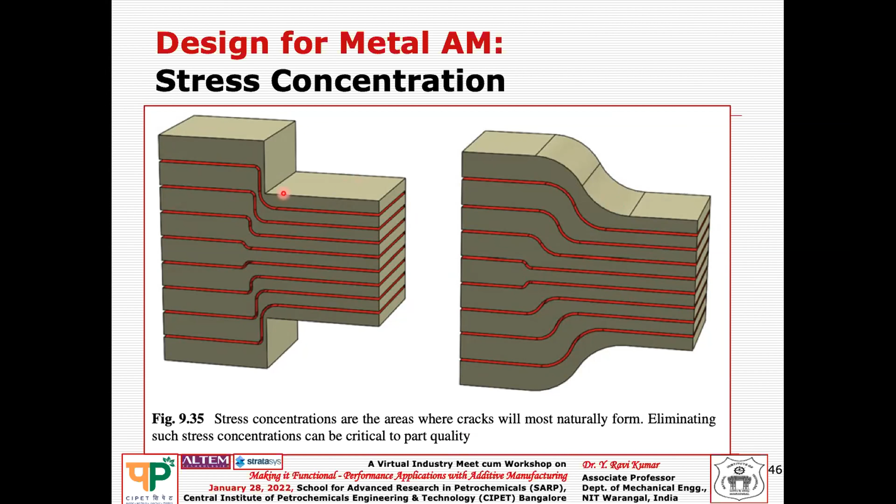Don't leave sharp corners. We need to do slight tweaking in the design, and even go with filleting. Because of non-uniform thickness, it may lead to deformation or stress concentration. Come out with filleted corners, and that will reduce stress concentration as well as minimize residual stresses.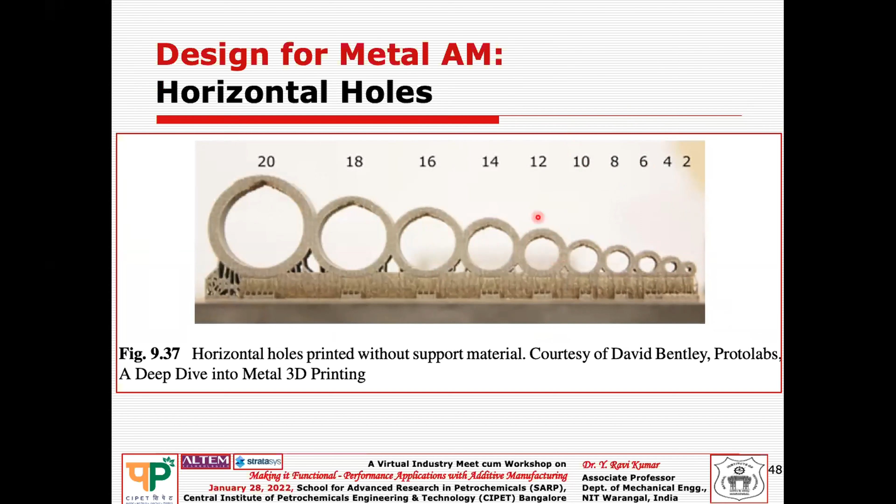Coming to horizontal holes, you have certain limitations. A 2mm hole is fine, 4mm fine, 6mm fine, 8mm, but slowly as you increase the diameter of the hole, it doesn't come out better - this is without supports. If you're looking at this kind of thing, we need to understand what is the threshold value or constraint, and then you may have a solution.

We need to design for additive manufacturing where we slightly tweak these designs. Maybe an 8mm circular hole is absolutely fine, no issue, but it may vary from machine to machine, material to material. Elliptical holes, maybe up to 20mm height are fine. Teardrop shape is always better, though that depends on the angle also. Then you have diamond shaped holes - we need to understand these design guidelines for additive manufacturing.

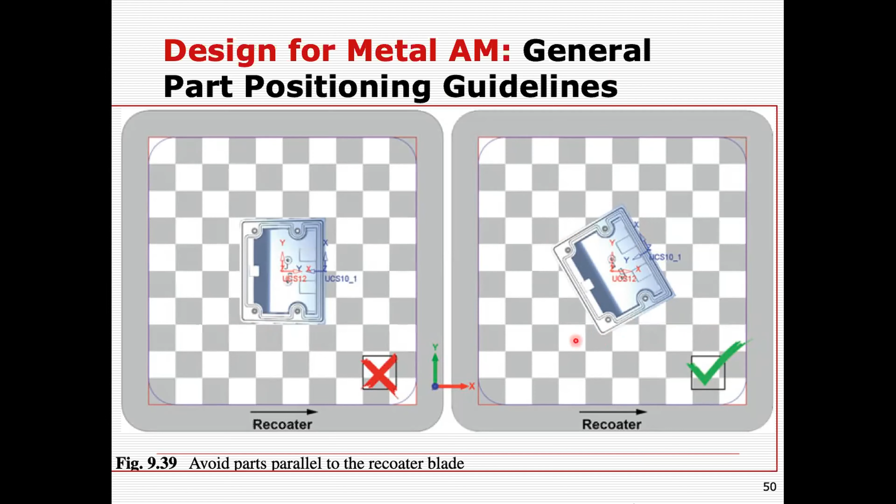Even for positioning of parts - this is the recoater, this is the recoater direction, and this is the part you're fixing. It's better to avoid having the recoater and the part parallel; better to keep it at some inclination to organize your parts. Don't line up the parts like this, but give some spacing - like this, but not in this way.

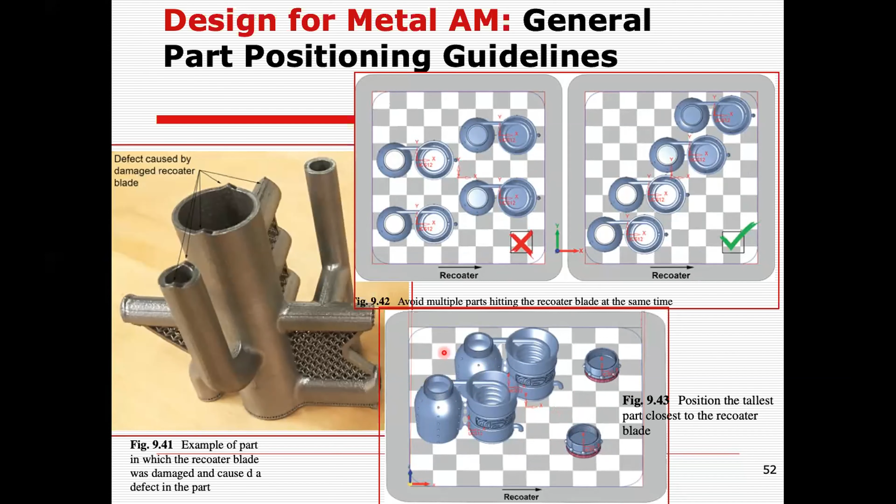If you're not following that, you may come out with defect parts which are damaging - some recoater blade has hit here, and because of that the part has been damaged. We need to understand these guidelines. With a very tall part, better to put it as close to the recoater as possible, don't keep it away - keep it very near to the recoater. These are some guidelines from Purdue University's design for additive manufacturing guidelines.

If the score is low, you may not need to worry much about redesigning or modifying the product. If your score is high, then we need to redesign or consider redesigning. There are certain platforms where you can find this kind of design for additive manufacturing guidelines.

Let me summarize and conclude my talk. You have several parameters - this is an Ishikawa diagram or fishbone diagram, targeting a metal AM system, but it may be very well applicable for polymer printing also, like where operator...

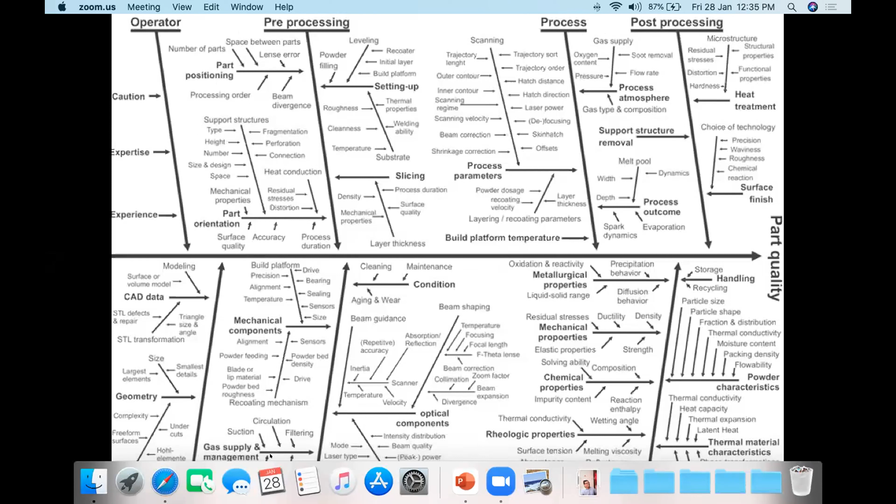While processing, there are scanning parameters and laser parameters which we need to understand, and then the gas supply and all that. During post-processing also, there are a lot of parameters that judge your part quality. We need to understand this and work on it accordingly, right?

Then you have the part related factors, maybe CAD geometry, and the mechanical components, AM systems related factors, and gas supply management, inert gas or vacuum, all that. And then you need to check the condition of optical components, like the scanning mirror and its optics, which may even affect your part quality.

And ultimately your feedstock or material - its metallurgical properties, handling size, rheological properties, chemical composition, mechanical properties, powder characterization, and thermal material characterization. All of that will affect your part quality, so we need to understand this.

Let me summarize what I have done for this session. We started with design approaches in additive manufacturing, AM process plan and AM processes, part consolidation with additive manufacturing, and conformal cooling channels.

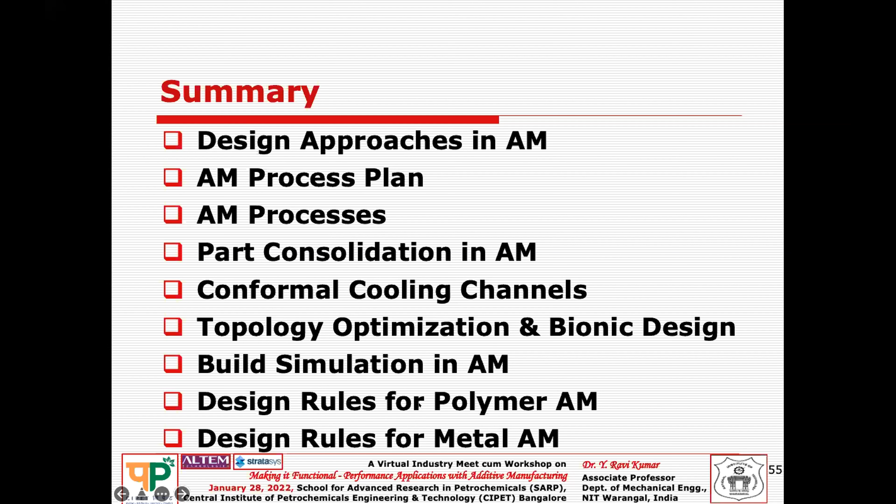It's an important concept here with AM, along with topology optimized structures, bionic design, and build simulation in additive manufacturing, and design rules for polymer printing as well as design rules for metal AM.

So we have the AM facilities at NIT Warangal. We have a metal 3D printer, and a couple of Stratasys make machines - the Dimension series and Mojo series machines, the FDM based technology. And we have desktop 3D printers, Ultimaker and other desktop DIY kind of printers.

And we have AnyScan and SenseScan, and a muffle furnace for post processing of metal 3D printed parts. And we have AM software like Mimics, Magics, 3-matic, Catalyst, and 3D Expert. These are some of the facilities we have at NIT Warangal.

And we are the people who started MTech in Additive Manufacturing in collaboration with CMTI in 2014. We started this program, and now we are self-sustained, running this program on our own from NIT Warangal.